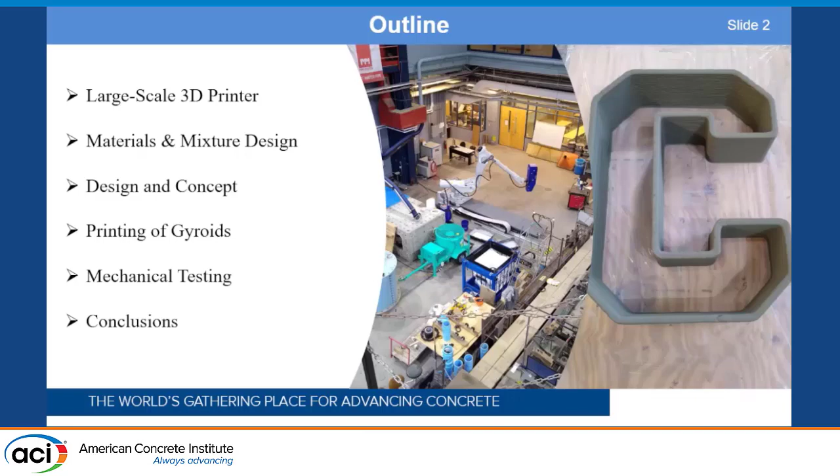So we have an ABB robot with a 12.8 foot reach. And along with this, we have an XtreeE system where you can see there's the pump in the back. It's a flowable mix that you can place into the pump, and then it goes through this black hose, and then it comes through this extrusion head. So this is called the xHEAD.

We also have a Mortarman mixer to mix large quantities, that's the green colored one in the back, and we can do mixing volumes of 50 liters. These are objects that we printed during our training.

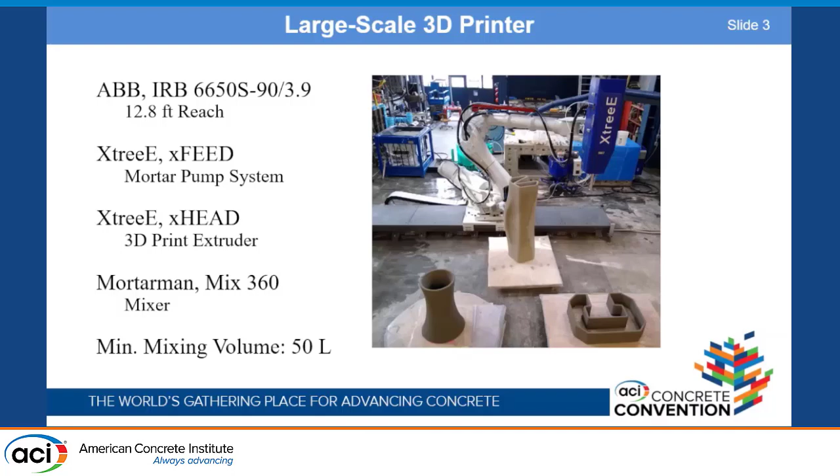So the mix that we used for the training was a bagged mix that came from Europe, but in our case, we wanted to develop our own mix design that we could use in the lab, and something that I actually knew the water to cement ratio to. So we developed our own mix, which has a water to cement ratio of 0.35. Our paste volume is 52%, and we have SCMs about 30%.

And we have to sieve our sand because the maximum particle size that we can pump with the system is 2 millimeters, so all this is extremely time consuming. And because we have a pumpable mix, we have a pump through which we can pump this material, we adjust the high range water reducer to achieve a flow diameter of about 17 centimeters.

So an accelerator gets injected at the nozzle in the XtreeE system, and the amount of accelerator can be adjusted based on the stiffness of the material coming out in real time, and it's anywhere between 8 to 12 ml per liter of concrete. So for this mix that we've developed, our compressive strength is 10,800 psi, and our 28-day flexural strength is 800 psi.

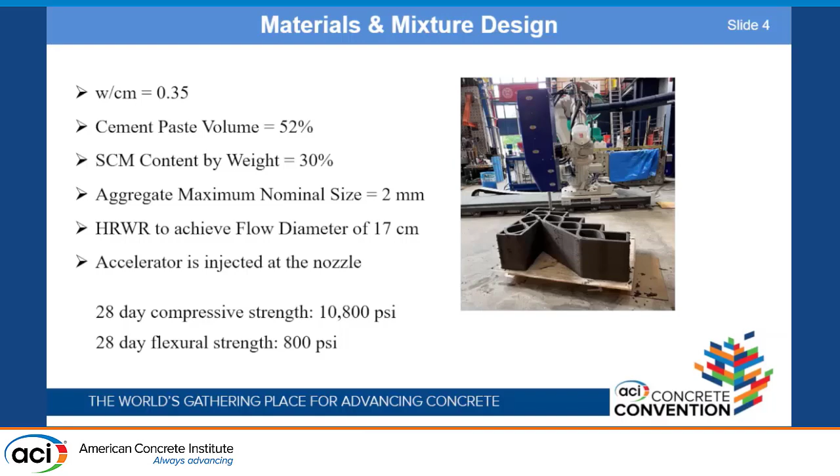What you see over here is actually steps that we printed to access our mixing station. It's been a few months now, and they're actually holding pretty well. As you can see in this one, what we have is a continuous tool path for one single layer, and we are printing the same layer over and over again till we reach the desired height of the structural element you're printing.

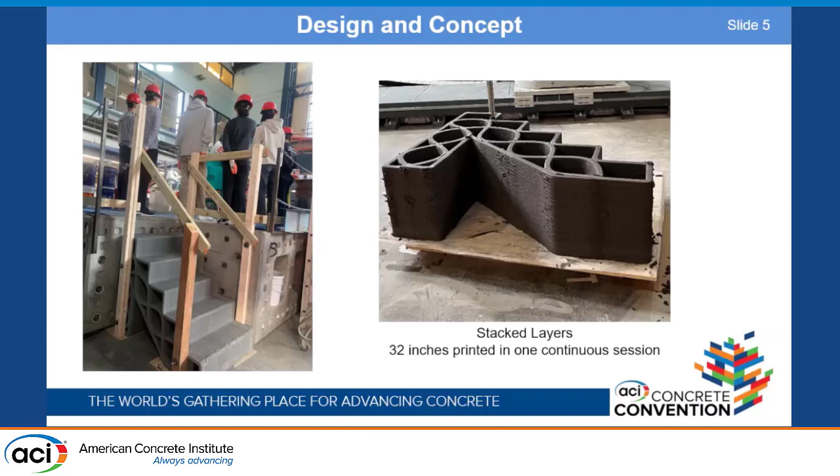The same concept was also applied for this arch that was printed over here. So we have a toolpath that's designed, and then we follow the same toolpath over and over again, stacking the layers. This is an arch that was designed by students in the course that I taught last semester in fall on sustainability and automation.

They got to design their own mix, which was quite similar to the other mix that I showed you in the other slide. If you deviate much from the paste volume, it's very highly possible you lose your hoses. So there's not that much room in optimizing your mix in terms of what is pumpable.

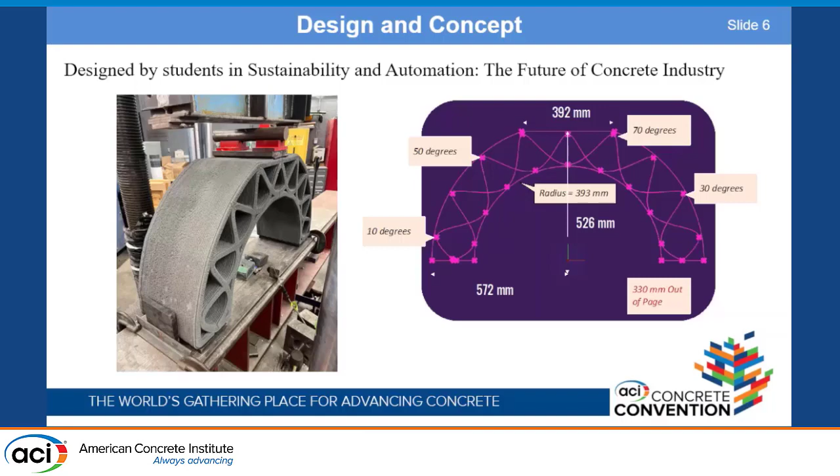So for the carbon footprint, we know that the paste volume is the main contributor to the greenhouse gas emissions. As I said, you really can't reduce the paste content significantly, otherwise you cannot pump the material, so the high paste volume is needed. So then one could say that the carbon footprint of a 3D printing mix is really high. Then how can you make it more sustainable?

So the path is that 3D printing enables printing of different shapes, and so shape optimization can be used to reduce our carbon footprint. And then the two-part system that we have, where the accelerator gets injected at the end, offers more freedom for quickly and consistently printing free-form structures.

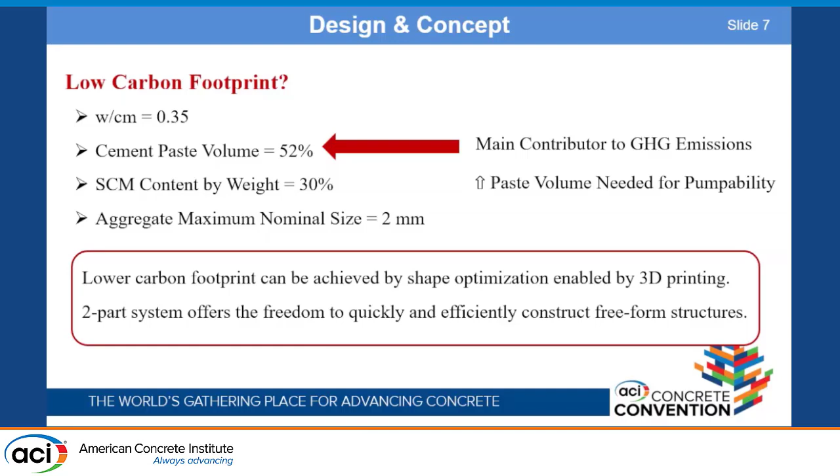So in the previous two examples that I showed you, we were only printing right on top of each other, so we weren't really pushing the limits of what is feasible. So we wanted to see if we could print other shapes, for example, gyroids. And you could ask why a gyroid? A gyroid because it efficiently distributes high compressive loads in all directions.

So instead of just stacking the layers, for the shape of a wall we wanted to see if you could fill it with gyroids. The challenge is, can you effectively print steep cantilevers? At this end of the gyroid, you can see how it has to print cantilevers, so you're not just stacking a layer on top of each other, but printing at an angle.

The benefit of this is that for a lower amount of concrete volume, you can carry the same load, and thus you're reducing the overall carbon footprint of your system.

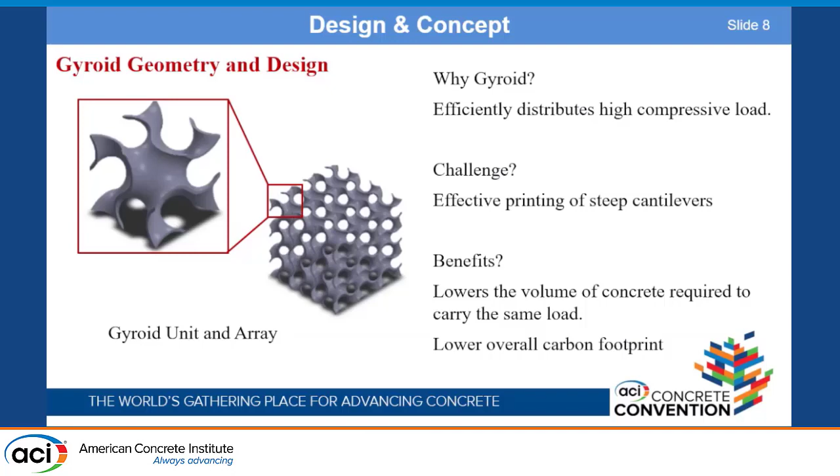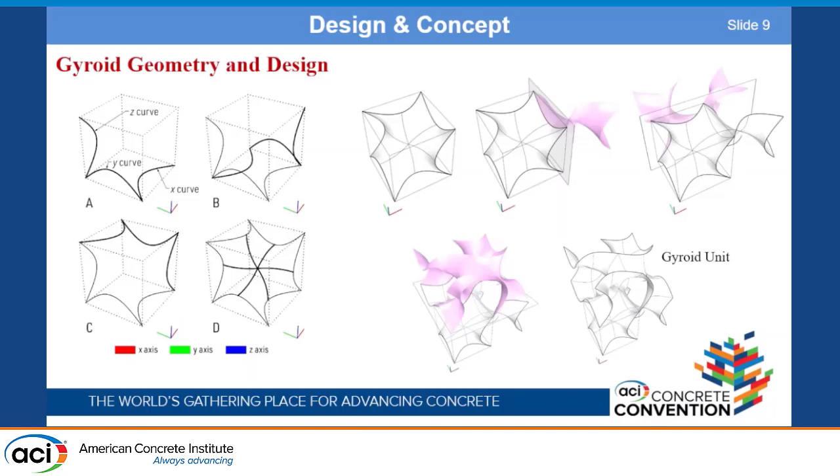So this is how we designed our gyroid. You draw 2D lines, 2D shapes, extrude them, and transform them to make these surfaces. These surfaces have high surface area, which is interesting for biological applications, and that's where this becomes bio-inspired. This becomes the gyroid unit, and then you repeat them until you create the structure you want.

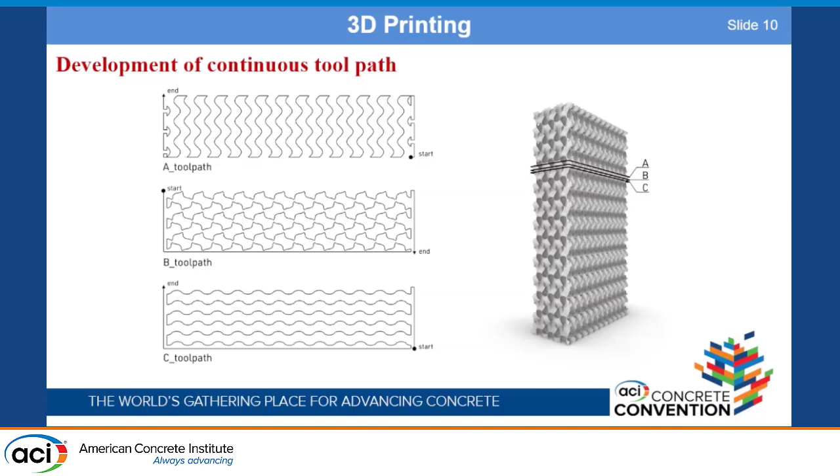So we conducted density limitation tests. For these gyroids we printed three different geometries. This is the steepest cantilever - each gyroid unit is further apart, meaning more spaces created in between, so the amount of concrete you need is lower. Then we went to higher and higher angles.

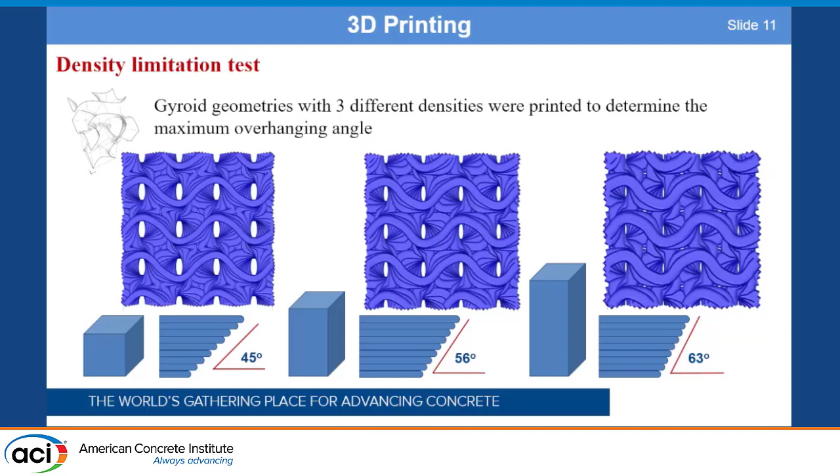The 45 degrees should be the hardest to print, and 63 degrees the easiest, because you can see the overhang in 45 is higher. For the 45-degree print, as you can see, we were actually able to print it really well. During printing we expected it to collapse, but it did not - it did extremely well. But this is on one side of the cube.

But if you look at the other side, at these corners, you can assume it's like a collapse, but it's more like a toolpath issue. Toolpath design plays a really significant role in the type of structures you can print, because we started and stopped at the same point, so it didn't have enough stiffness to carry the weight of the next layers. So toolpath plays a significant role. After a few hours of printing at the 45-degree angle, we did see cracking in this section. So 45 degrees, I would say, is still too steep with the systems we have right now.

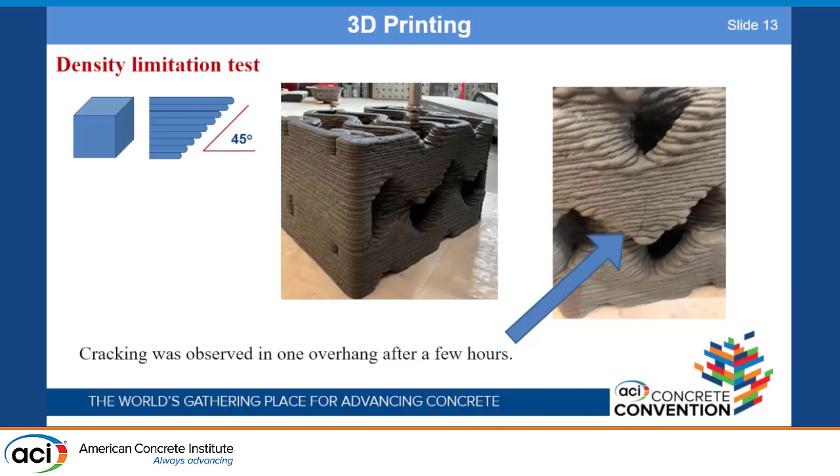The 56 and 63 degrees printed without any challenges - it was completely fine. So we're still able to print a significant angle for these gyroids with so many open spaces inside. Because we're not architects, we're engineers - we like testing them.

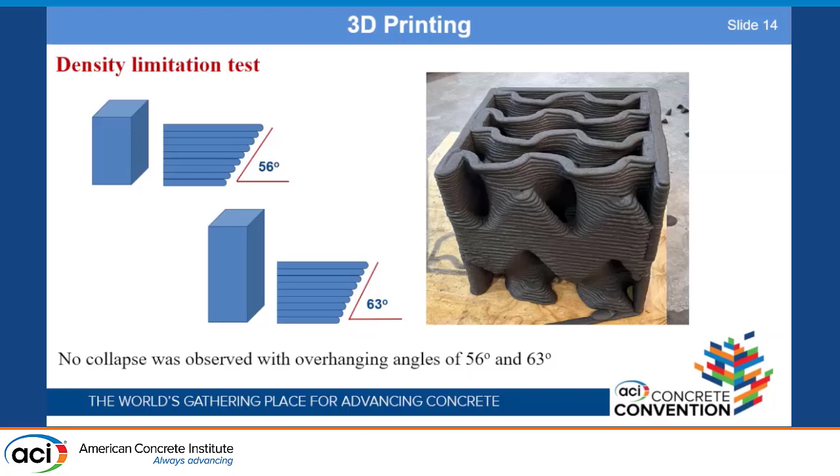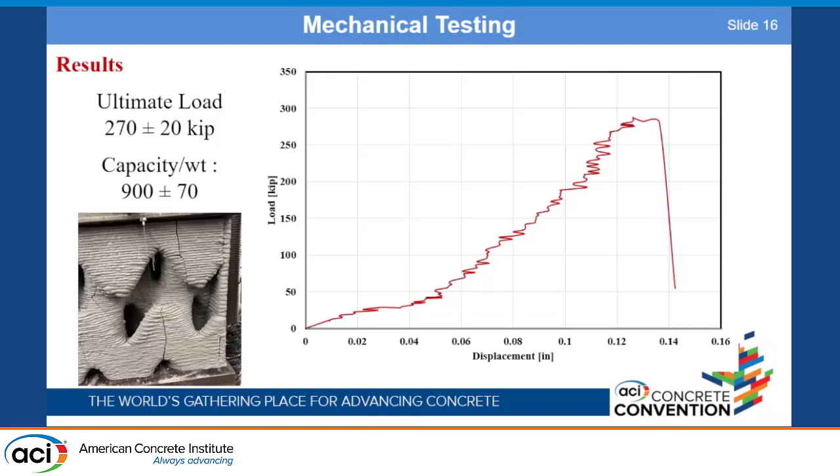So we tested it under compression, and you can see it carried about 270 kips, which gives a capacity to weight ratio of about 900, which is significantly high. It's taken quite a bit of load compared to the weight of the entire structure.

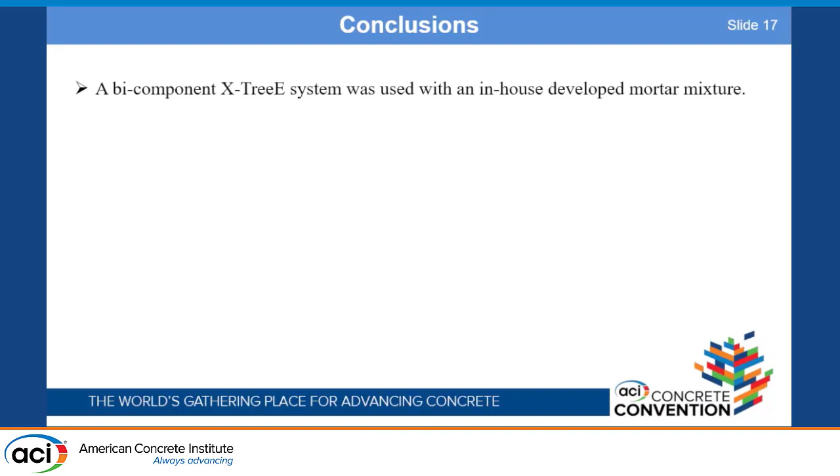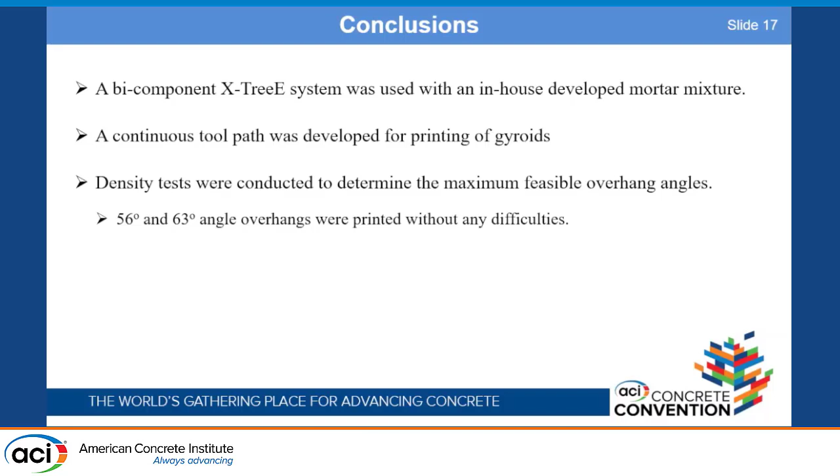So the conclusions are: we've used the bicomponent X-TreeE system, but developed our own in-house mix, which has significant compressive strength - it's a good material. We've developed a continuous toolpath for printing gyroids, and conducted density tests showing feasible overhang angles of 56 and 63 degrees.

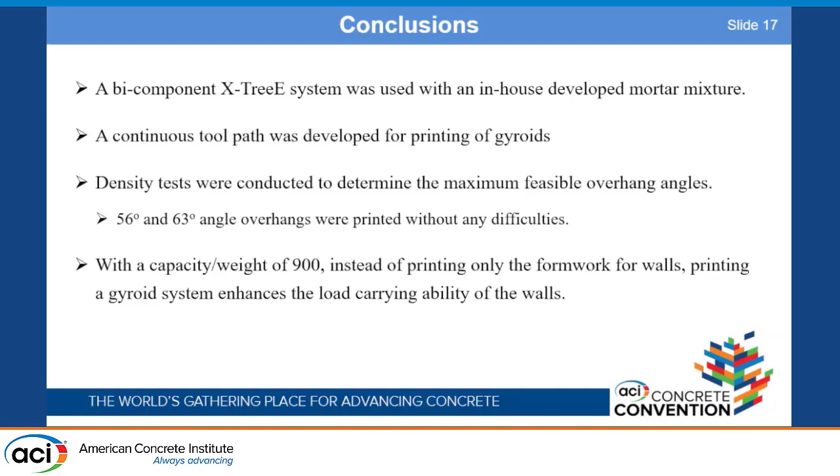With a capacity to weight ratio of 900, the way to see it is, instead of using 3D printing just for the formwork, you could actually increase the structural capacity of the wall by designing these gyroid systems, because they can take significant structural load that's being transmitted to the system itself. So there's a lot more we can be doing with these systems, and we're excited to be pushing the boundaries of what we can print in our lab.